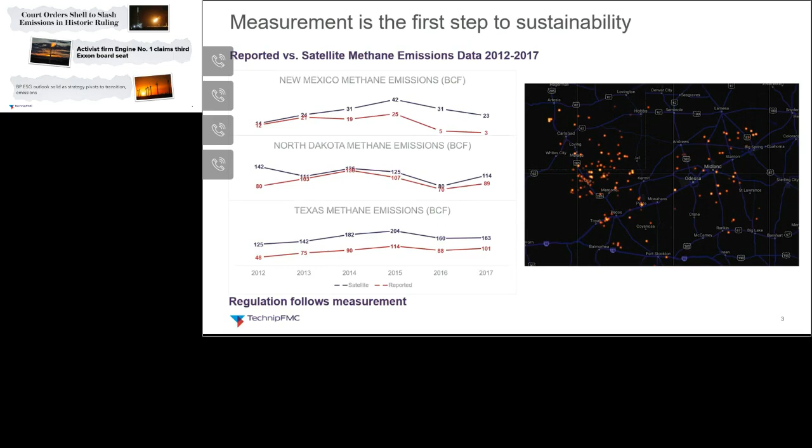The animation on the right shows the visualizations that are possible using satellite imagery, and using these satellites to estimate that flaring volume. The charts on the left capture just how much emissions have potentially been underreported in the US.

Regulations in several regions have gotten stricter and stricter. Colorado has effectively banned flaring, and North Dakota has limited flaring volumes to 8% of total gas production and removed the allowance for those short-term flaring operations during completions. These changes have resulted in operators shutting in or dialing back the wells in order to meet these regulatory requirements.

So as we've been walking through different sites, we know a number of operators are working on the measurement piece and leak detection. Measurement is so important, and these are absolutely necessary for us to move forward as an industry. And this is leading to a lot of conversation about how we can capture emissions after the fact. But what our system and our team focused on is actually prevention of the emissions in the first place. In particular, what can we do to proactively engineer out the need to flare? And what can you do up front to remove emissions-related equipment?

And we think of this a lot as analogous to our safety journey as an industry. In the beginning, we identified risks, and then we thought about risk mitigation, and we thought about things like PPE and better tools, better reactive processes and training. We started a conversation around left of zero. We talked about bow tie principle, but then finally we thought, let's engineer the safety risk out as much as possible. Let's engineer out the risk where we can to avoid pinch points, working in the red zone, being in confined spaces. Let's focus on prevention. And this is very similar to that journey.

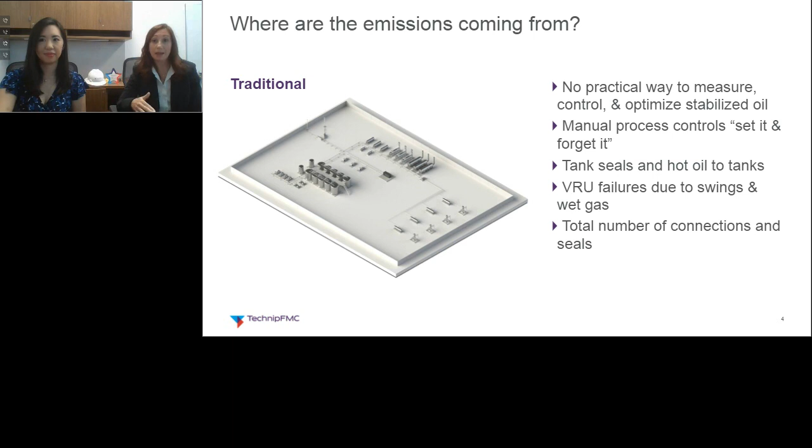Our approach uses unique design, digital integration, and process automation to optimize the entire production operation and deliver more liquids to the sales line and less gas to the flare. So after 3 years of working on this, talking to customers, and deploying our first unit, I'm proud to share with you what we've created. iProduction replaces the central tank battery and delivers more on-spec oil and minimizes emissions. You'll notice there are no tanks on this site.

Instead of using arbitrary rules of thumb, our proprietary system accurately predicts the RVP of the oil, allowing us to remove those tanks from site and reduce flaring. By using our digital platform to control different parameters, we can reduce the amount of gas going to the VRUs and coming from tankage, which results in less flaring and fewer emissions.

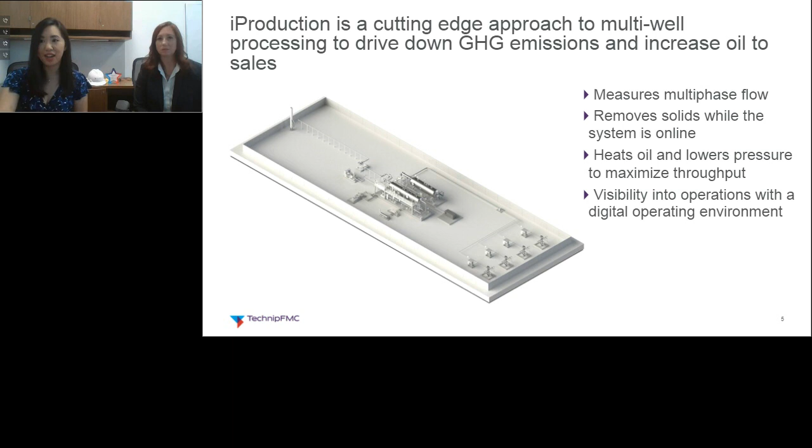We want to leverage our expertise in efficient design and packaging of separation and process equipment from our offshore and subsea experience to create value for unconventional operators. This system can process up to 20,000 barrels of oil per day with 60% less equipment and incorporates that digital platform for remote monitoring and preventative maintenance. Our modules work in concert with a digital control system to intelligently adjust for the challenges throughout the life of the well.

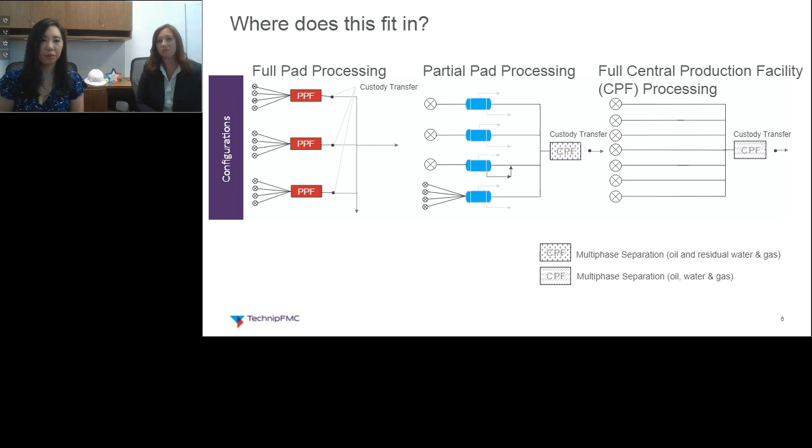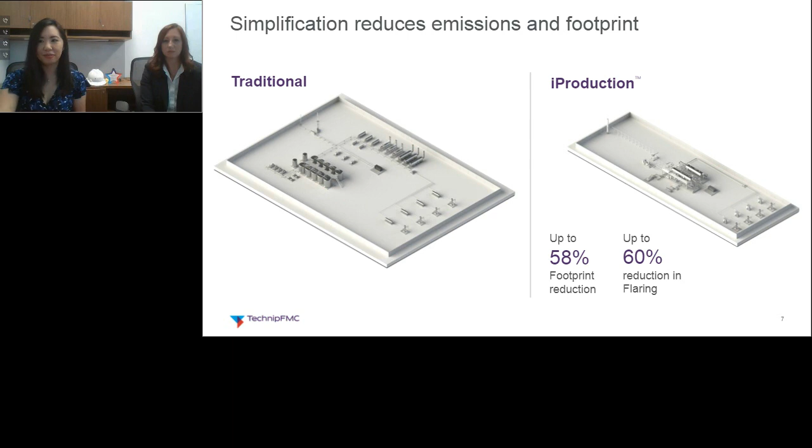We compared one of our sites to a neighboring site with similar flow rates. On our best days, we reduced flaring by over 90%. But that comparison can vary a lot from day to day and how well your equipment's behaving. So in this next section, we'll dive deeper into exactly how we hold up our end of the bargain in reducing emissions.

So in collaboration with our customer in the Permian, we set ambitious targets for our design to reduce emissions by 60%. They shared their basis of design and existing cost structure that allowed us to fully examine optimization opportunities. And our customer was focused on reduction of construction costs and direct field labor hours. And we were able to collaborate with them at every step of the process to realize a fully operational system that meets the targets, in some cases exceeds, and reduces the total equipment count.

So many of the realized benefits come from the consolidation and packaging of equipment, in this case from 22 modules down to 6. The lower equipment count reduces maintenance, installation cost, and venting. Safety risk is also decreased due to the reduction in manual intervention the system requires. Yeah, and that reduction in manual intervention comes from our digital components. That enables us to do remote operation and increases opportunities for optimization through automation.

Our proprietary technology allows, for the first time ever, constant monitoring of sales quality of the oil in real time to ensure maximum oil to sales, increasing revenue. So I just want to make sure everybody heard what Isabel just said, because it's a pretty revolutionary statement that we're able to constantly monitor the sales quality of the oil and get a real-time RVP through our system in order to optimize the system all the way through. The iProduction system is a whole new level of control and visibility.

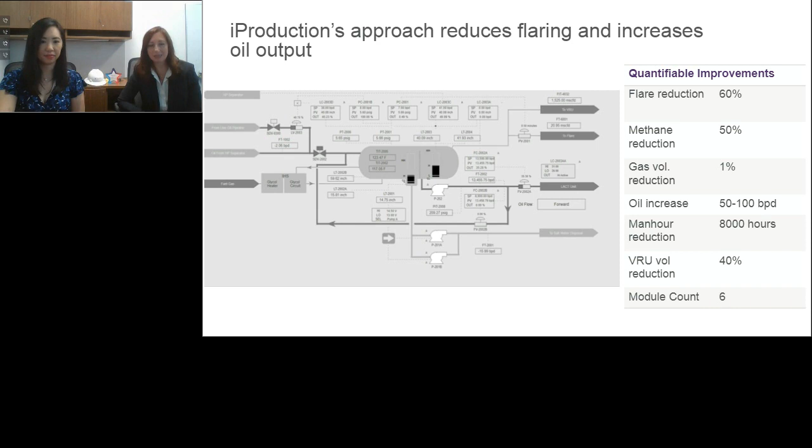We've also looked at how we can interpolate this technology to retrofit existing facilities with the goal to bring very similar results to existing assets. It's a very exciting development. Yeah, I'm really excited about it too. One of the key enablers of the system is our advanced oil stabilizer.

I feel like I get two reactions whenever I say stabilizer. Either your reboiler is going to be full of salt, or that doesn't look like a column. Well, you're right. We don't have a reboiler, and this definitely isn't a column. The system combines the functionality of a heater treater and vapor recovery tower, much like a stabilizer, but it has a much simpler function. The system utilizes an intermediate heating system and an integrated heater to provide better efficiency with low NOx burners.

So this way of heating is far more reliable than burner tubes and also takes different types of emissions in mind. The package allows us to control the temperature of the oil at low pressures that can result in more oil than heater treaters and VRTs. The edge-based RVP monitoring system allows adjustments to be made during flaring events to minimize flaring and maximize oil. So let's take a look at an example in the video to follow.

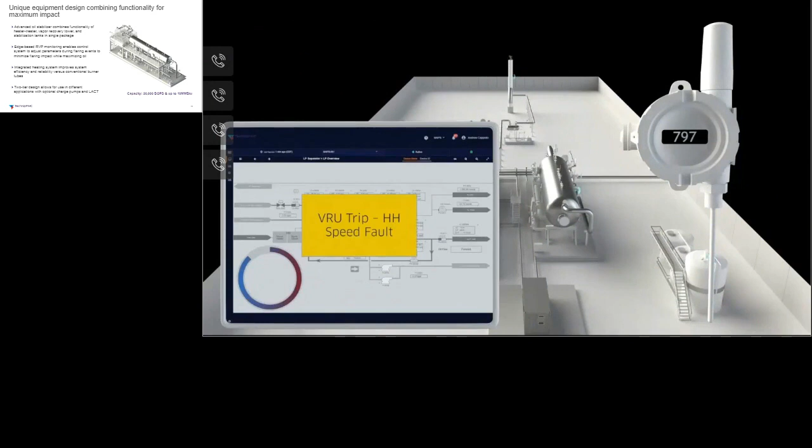So in this scenario, we have a system that has iProduction. The data is streaming in from all different pieces of equipment to the control system that is remotely viewable through a tablet or browser. There's an overflow tank there to help operations get over their apprehensions on a tankless system. So tank vapors are going to VRUs, and one of the VRUs trips and goes down. The flow rate going to the flare goes up, and you can do a series of interventions, either manually or automatically, to turn down that rate going to flare.

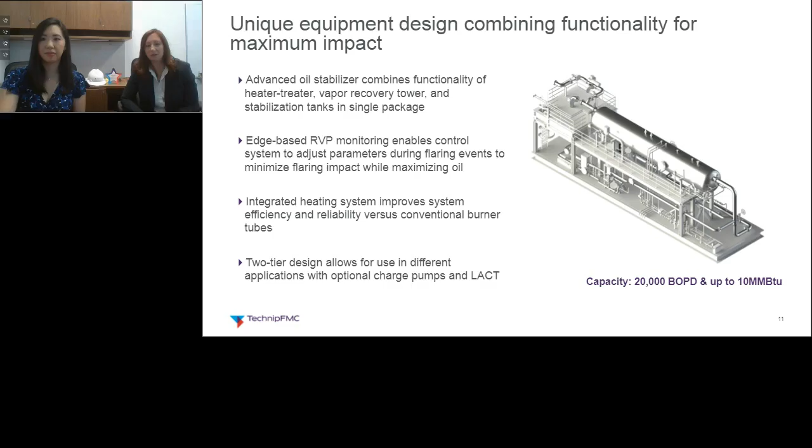So like many parts of our industry, digital automation is changing how we work and what we can control in the field. Previously, digital twins existed in the cloud, but focused on monitoring and weren't able to give us the true real-time responses to what was happening in the system. Now, today, the diagnostics and processing take place on the edge, and automation and updates and additional changes can be dialed in remotely through the cloud.

Yeah, the system divides and conquers. So we can track long-term trends in the cloud and focus on immediate interventions at the edge. So these digital insights are key to maintaining reliability with the VRU especially, but also optimizing the entire system.

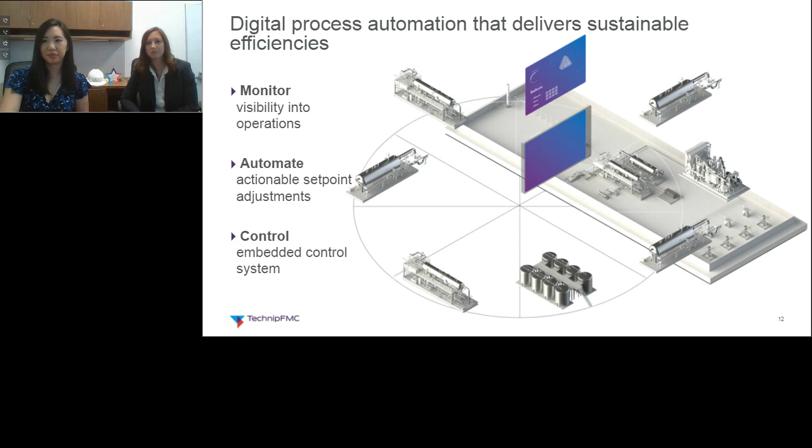So far, I know you've seen a number of illustrations in our slides that we're using today, but we thought we would close with a picture of an actual system that's deployed in the field. Now, these layouts can vary, but this obviously is an impressive sight.

More exciting, though, are the results that we have seen through our studies and the deployments. The system reduces emissions and flaring oftentimes by over 60%. The process creates more on-spec oil to sales, and meanwhile, through digital automation, we have unparalleled ability to calibrate and respond to the dynamic conditions that Isabel's talked about today through the facility, which increases reliability and reduces the need for manual interventions.

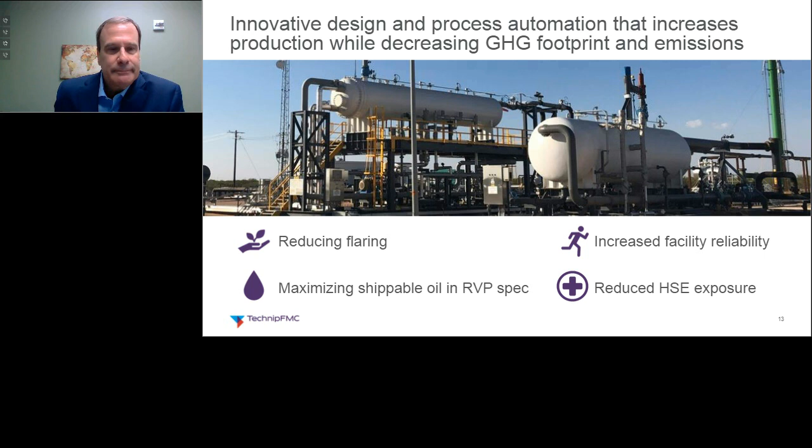Can you share what is the average increase in production to the sales line you can get using this system? So average is sort of, it really depends on the site. So we've seen up north, you can go between 50 to 100 barrels of oil per day in some studies, and some fields you might not see any increase. So it just really depends on what your setup is.

Great, good answer. How soon can you see a difference in flaring and emissions after you implement the solutions? I mean, through the digital automation that we have that we've described as part of the system, it's a pretty immediate impact. Once we are calibrated, we're able to run forward in that new system, and it's pretty immediate. Yeah, it's kind of crazy how fast you can see a difference.

Perfect. Next question, is the application of these technologies limited to gas or oil or specific oil types? I think it's really more of a liquids targeted system for now. It doesn't mean that there can't be applications to gas fields, but we're really focused on delivering value for those liquid fields.

Good answer. Can you share some of the detail on the process your team goes through to plan and deliver these solutions? All right. So typically what we do is we sit down with engineers and we try and figure out, what does your site look like? And then maybe where are some of the places where there could be efficiency gains. And of course, we have our own solutions, but we're really trying to find the best optimized system for our customers. And so we'll sit down and discuss our goals, and then we'll maybe go take a visit to site and just make sure that we really understand what's going on.